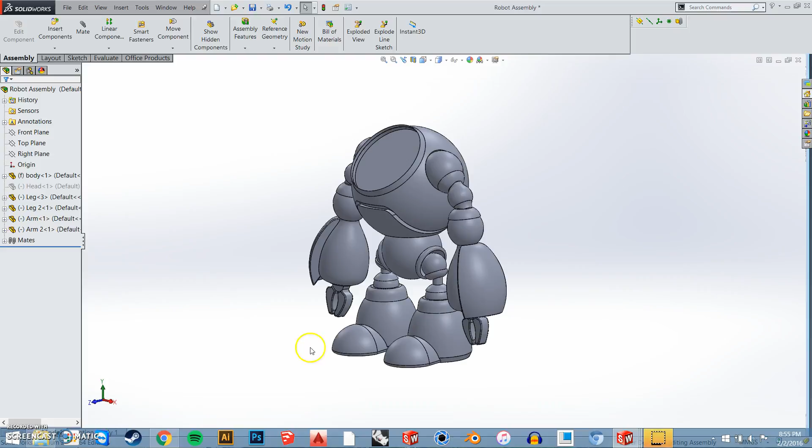Probably one of the first things is that when you're building your parts, you're going to have a left and a right leg, or right and left. But the thing is, you only need to actually build one, and then you create the mirror of the other. So I'm going to first show you how to create that mirror part.

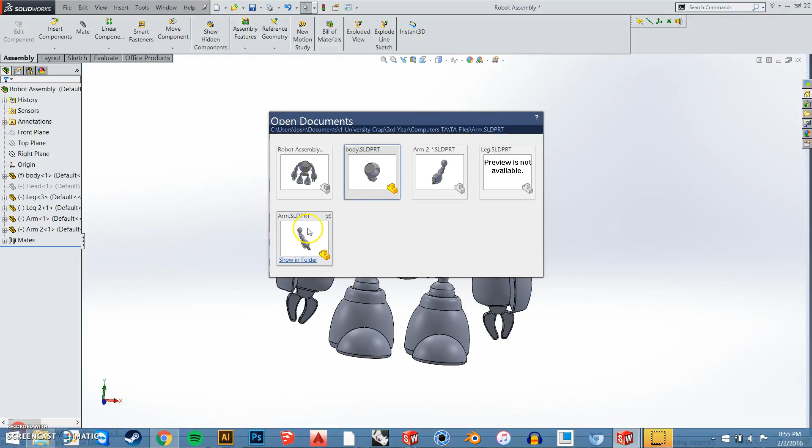What you want to do is open up your part. I already have it open here, and I'm going to use the leg as an example. Actually I'll show you the arm first, because the way Evan did it is another way you can do it. But I'll show you the other way first.

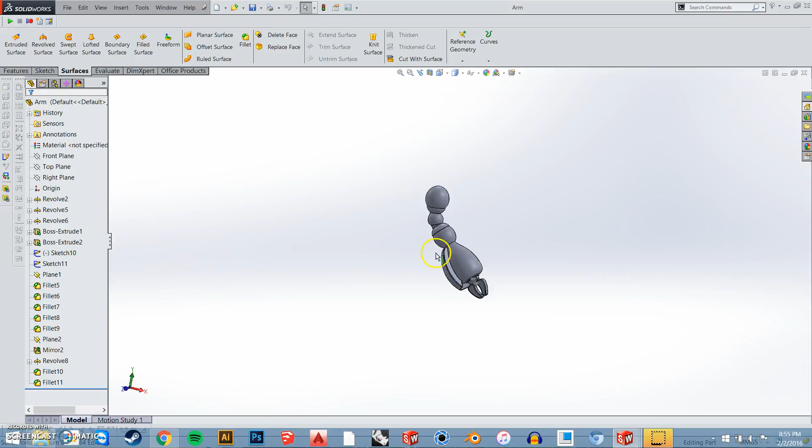So basically what he has done is... this is the wrong one. This is the main part. When you finish your one part, you go and save it as another copy, save it as a different name, and then it'll come up as a different name. So it'll look like this.

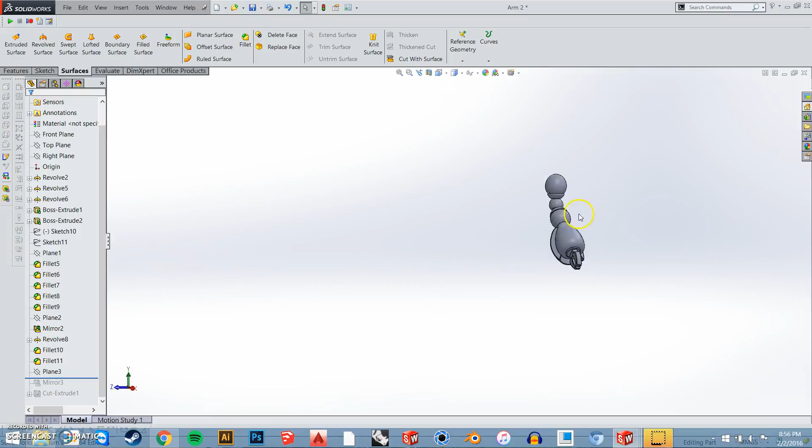It's exact, let me just roll back here. So it's the same part, exact same part as the other one, except it's named arm 2 instead of just arm. So you can name it left arm, right arm, however you want.

But basically what he's done is at this point, he's put a plane. Actually, that's not the right one. Well, basically what you do is a mirror feature right here, and they mirror all the parts. So I'll go back and edit this to show you what it looks like.

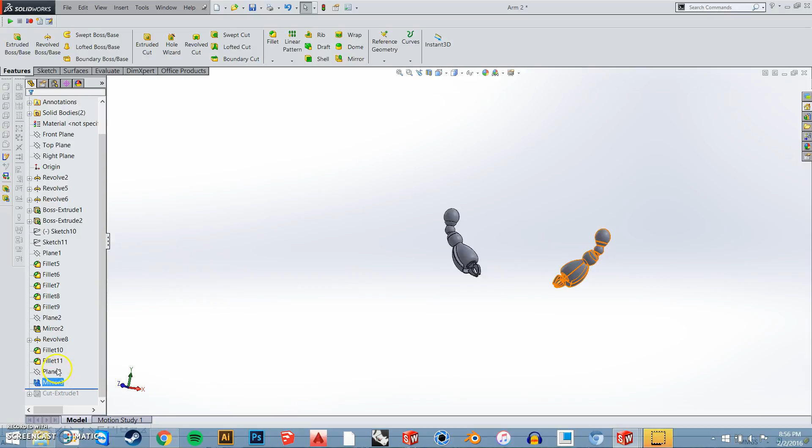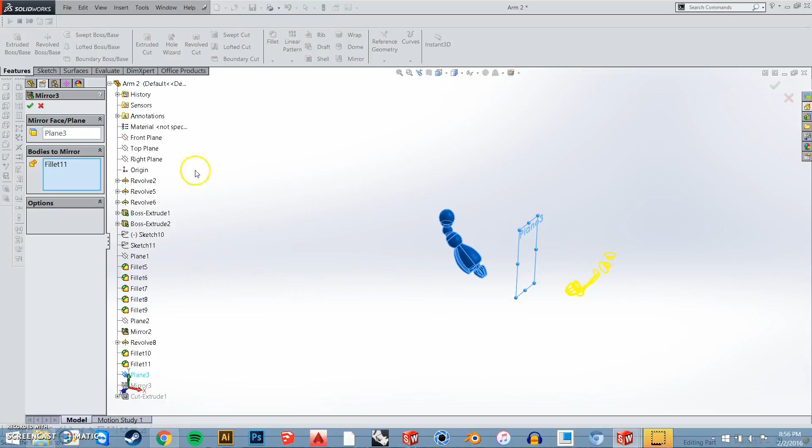Basically, you select... where's the body? Okay, well, this is the body. You just pick highlight and you can cover the whole thing, just like that. And then it'll make a mirror on the other side like this. So you can do it over any plane, it doesn't matter as long as it's not interfering with the original part.

So there, it's mirrored. And so now at this point, he drew a really big square on that one plane that he just mirrored.

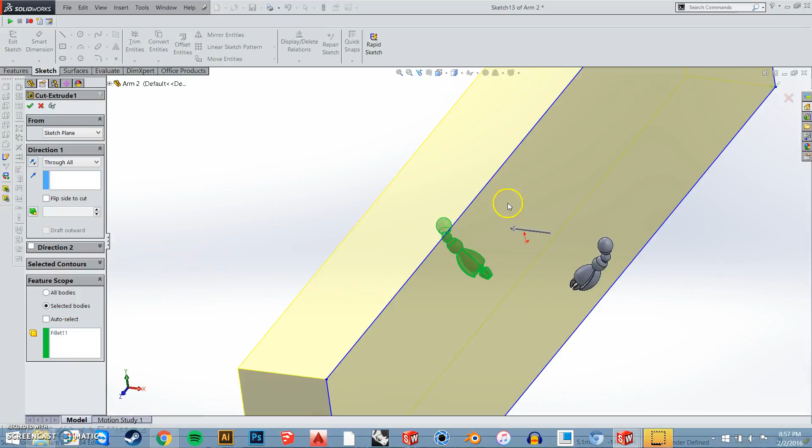And did a cut extrude through just the one body. If you go down to your feature scope, you can select that specific body, and what it does is it completely gets rid of it, so you're left with just the one part.

So what this does is it gives you a mirrored part, but it has all of the features in which you've created it up on the tree here. And that could be good if you actually want to go back and edit individual pieces.

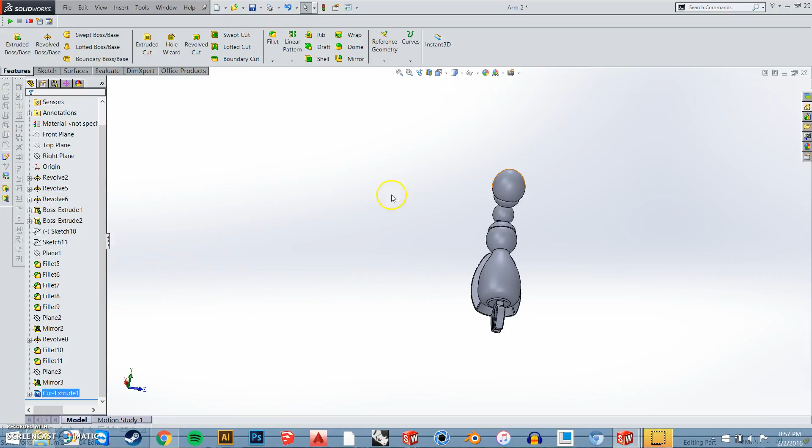But the thing is, once you edit this, it's not mirrored on the other part. So I'm going to show you how to do that properly so that whatever you do to one part will mirror on the other part. It's pretty easy to do.

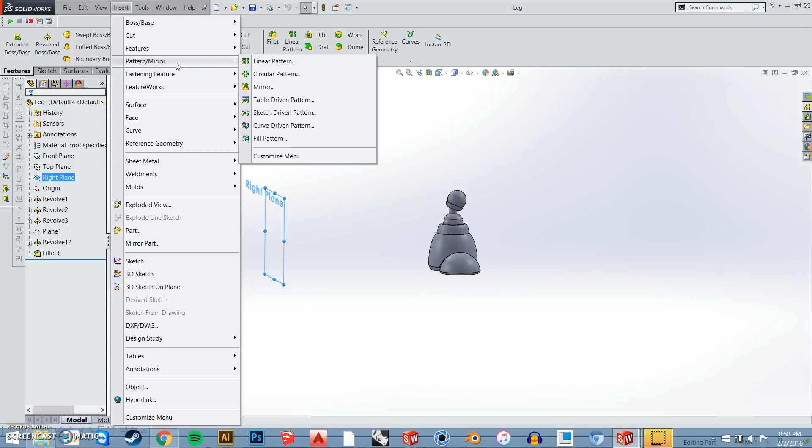All you do is you come into your part, select a plane. Let's go with the right plane for this instance because it's not interfering at all. And if you go to Insert and Mirror Part right here.

Click that. It may give you an error, that's fine. It's just asking what template you want to use. Just make sure you do solid bodies, that's the main thing because we're using solid features. Don't worry about surfaces and stuff, but usually these are selected by default.

It's just saying that any part you work on is good to be like this, and now you have part 1, a new part. So do save as, called it left leg, and hit save.

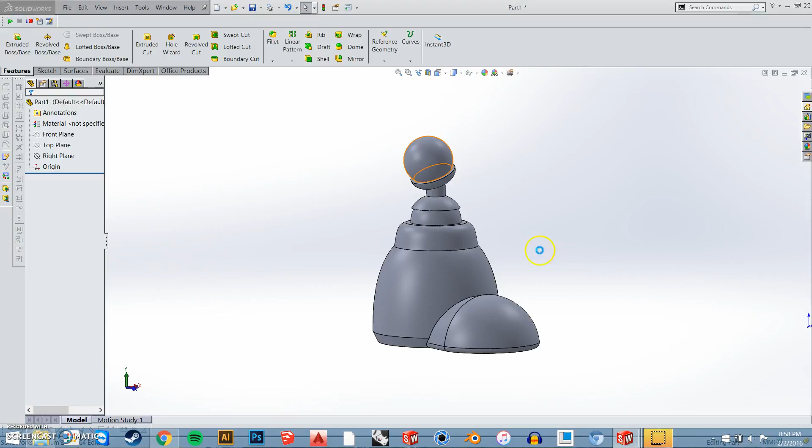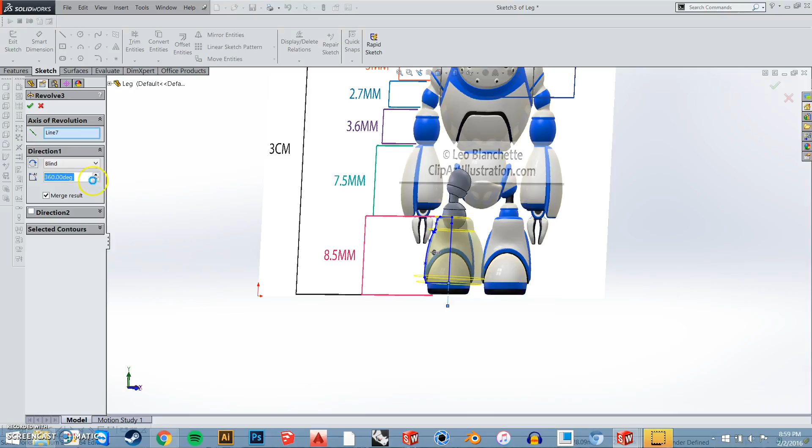And there you go. There's no features in the tree over here, but it's absolutely linked to the other one. So if I were to go into the other leg and edit this, I'm just going to make it look all... let's go 180. I'm probably getting an error here, let's see what happens. Okay, so I've just done that to it. I'll save.

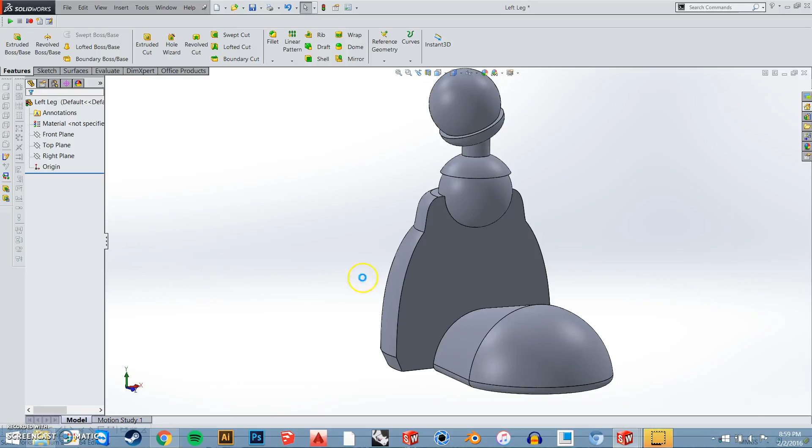Open up my part that I just mirrored, and see how it mirrors it exactly. So if you're doing any sort of editing and stuff like that, it makes it very easy to do. But if you did that where you just made the mirrored part as a feature instead of a part, it won't actually do this where you have to individually do it on both parts. So this is just a quick way and easy way to do that.

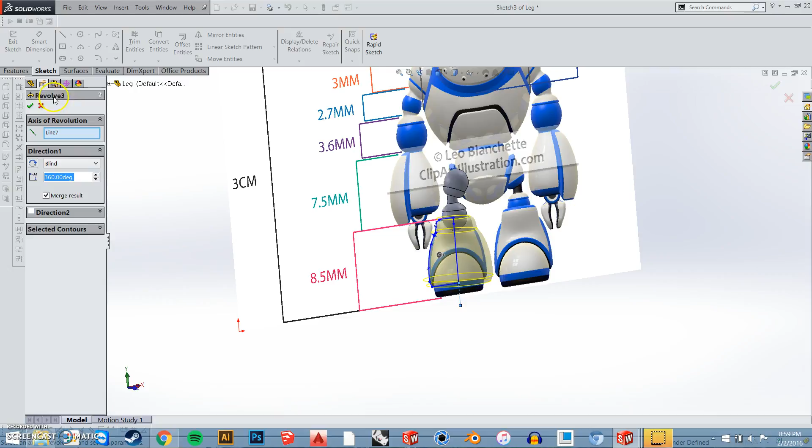So I don't want this to do that, so what I'll do is edit that again. So that's basically just how you set up your parts as a mirror. Let's save that. And you see, it's mirrored exactly as it looked like. So that's the best way that you can create a mirrored part in SOLIDWORKS, and it's also super easy, super fast.

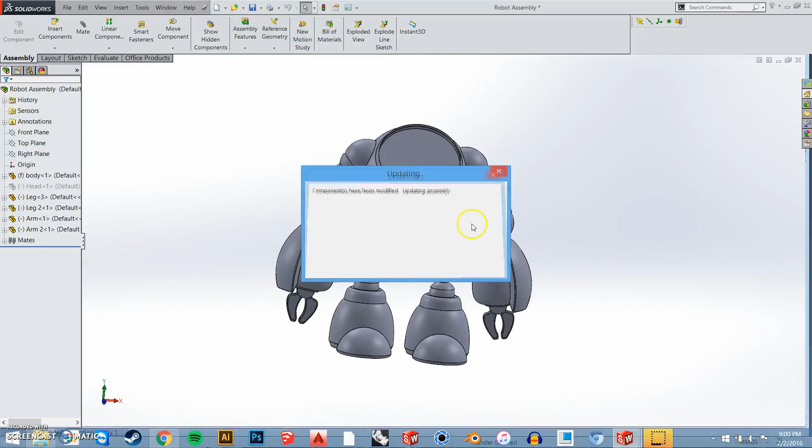So what we can do now is go and start to make this assembly. Basically what I want to do is I'll close this and make a new one. So what I'll do is open up the body just to start from there.

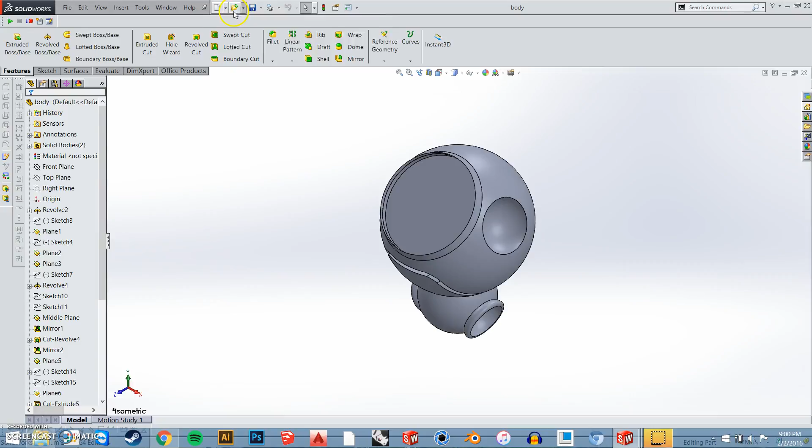You can go up to this new tab up here and go New, Make Assembly From Part. I find the easiest way too is because it default selects the body, or you can—I'm going to select the body for this.

If you go up into View and go to Origins right here, you'll see a little blue origin shows up, and if you click on that, it will snap right to it, and it'll be a fixed part. Just like Jerry was saying before, any part that you insert first will be fixed. So for this instance, it is helpful for this to be a fixed part, so I'm just going to leave it. To import more parts, what we can do is go Insert Component.

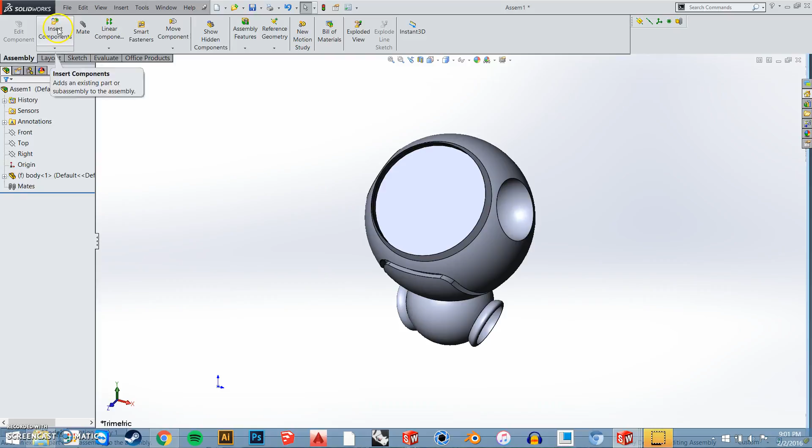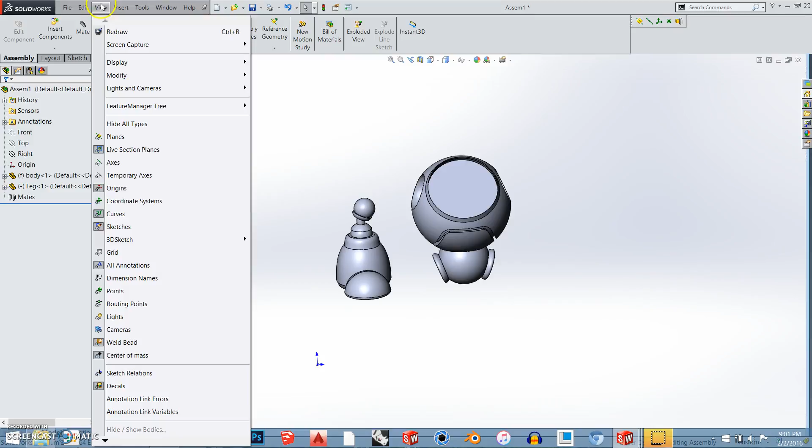I'm going to insert the first leg for now. You can click anywhere in space for now—if you click on that point, it's going to lock it in place, and that's not necessarily what you want, so put it in space for now. These origins might come in handy sometimes, but they're also kind of annoying sometimes, so just to turn them off, you go into View, Origins.

It's pretty simple. So to mate this part to here, I can tell that there's a concentric relation between the two of them. So if I hit the surface, hold Control or Shift, and hit this surface—oh, it gives me this. And it works, yeah, okay, it works.

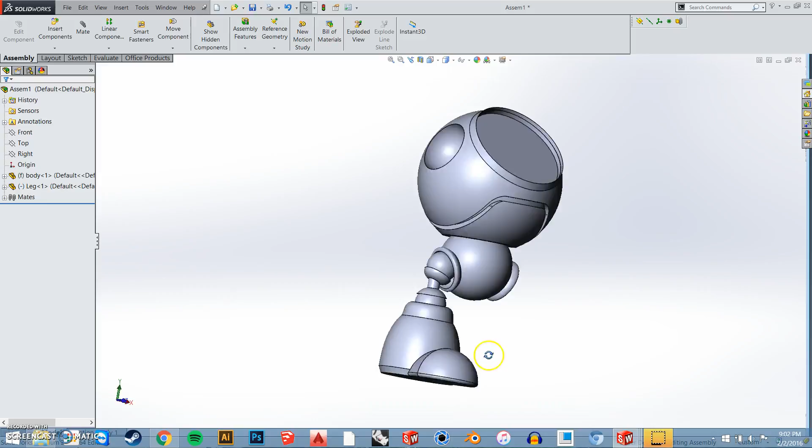And if I were to grab this and start moving it around, you can see how it kind of spins like a little socket joint. That could be helpful if you're making renderings and you want to make it look like it's running or something like that—it's definitely possible, but for this instance I'm going to make it fixed and give it enough relations so that it can't move.

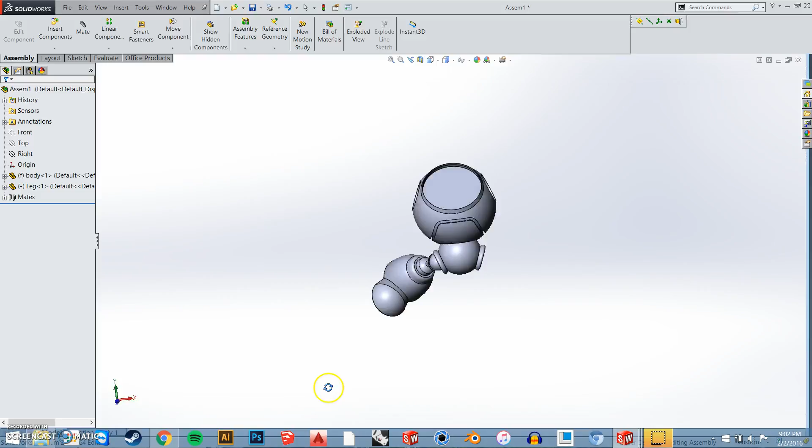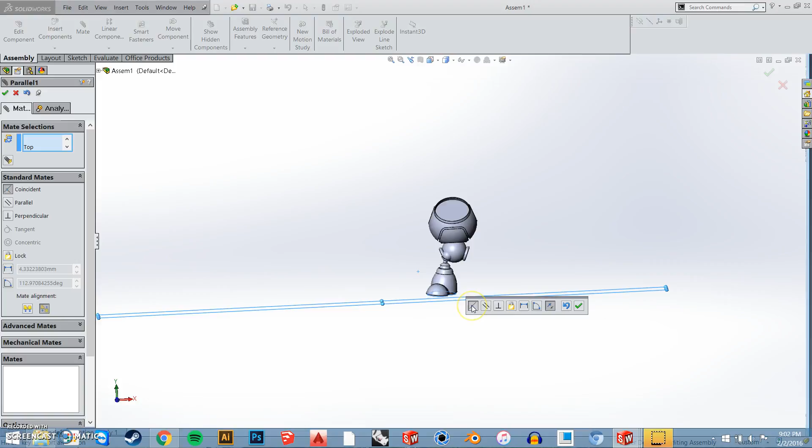So this platform on the bottom I know is flat, and I want to make it parallel to the top plane. So I can hold Control and click whatever I need to and hit Mate up top here. And see, it automatically sets it already because it thinks that I want to put it parallel, and that's absolutely true. I want parallel because if I hit coincident, I should get an error—it says it's too far away, there's an angle on it, so that's why it's asking to be parallel, and that's absolutely fair.

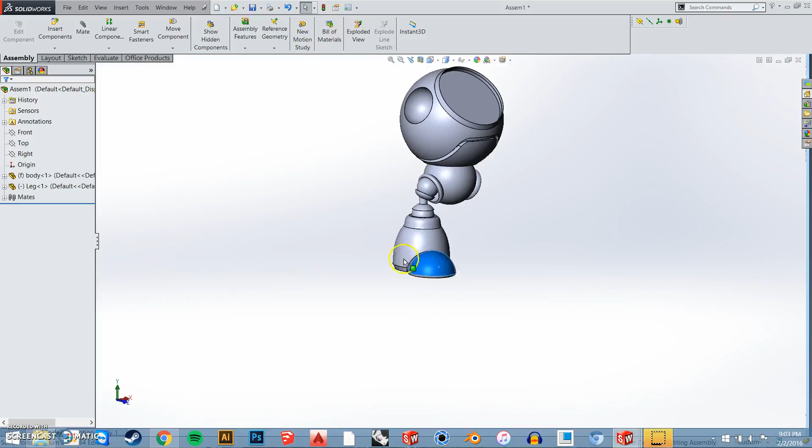So check. And to test and see—because you can see over here there's a little minus sign next to the part, and that means that it's not fully defined yet. It's kind of like a blue sketch, so you can still move it around, and I should be able to see how it spins. That's not what I want.

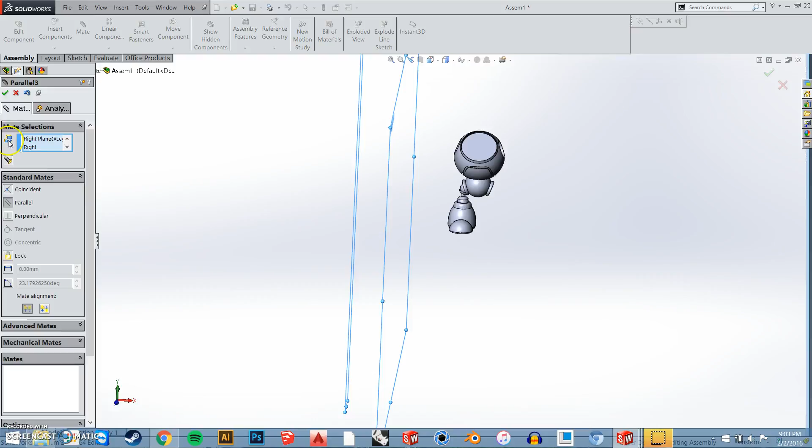So what I'll do is see if I can define another plane within it. So that looks—that right plane may allow me to... I should be able to make those two work. These are things as well, you don't actually need to make surfaces to surfaces or parts to parts—you can actually do reference things within the parts, like the two planes. So I hit Control on both those planes, hit Mate, and made them parallel. Check, and it's still not defined.

I think it's just because it's a pretty loose socket, but I'll leave it there for now. But if you can't actually define it and you want to make it stay in place, you can always right-click on it and hit Fix, and it won't move at all.

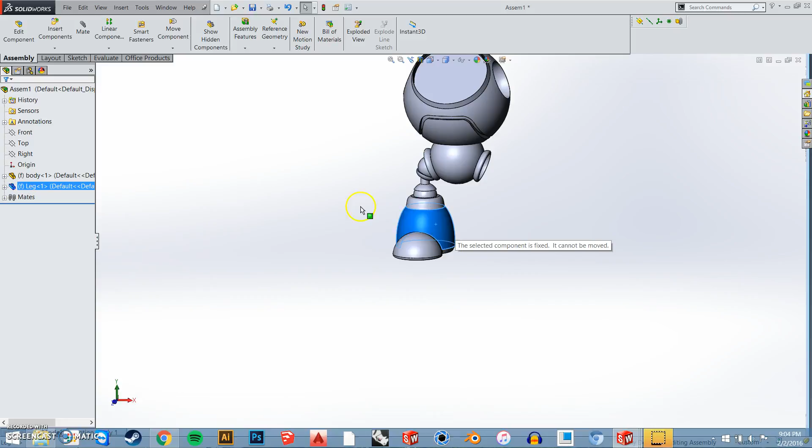I'm just going to leave it for now because it's not going to be that big a video. So that's basically how you insert a part pretty easily. Now I'll insert another leg, the left leg.

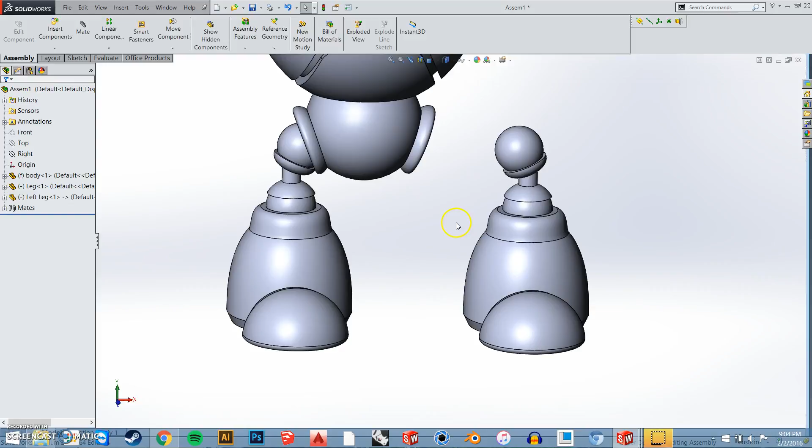If you've watched one of the tutorials I was doing before, I mentioned how using these ball and socket joints is the easiest way to make mates, and it absolutely is. It's very simple to do. You can make some bigger than they need to be, and they'll still stay in place. That's definitely easy, and it'll make things a lot easier if you've done that.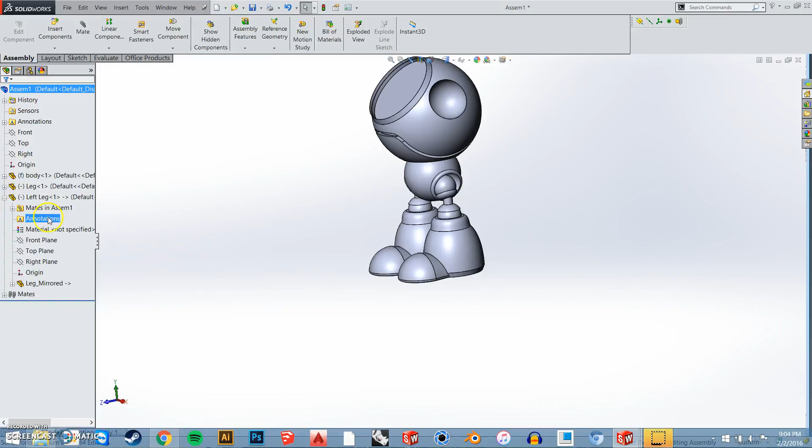Again, let me just do the top plane to the top plane. Actually, in that instance I was able to do parallel, or sorry, coincident. So now that I've seen that actually works, I'm going to go back and edit this mate.

What you can do is click here and then go click on mates in Assembly 1, and it tells you individually the mates related to this. Because sometimes if you go down to the very bottom, especially when working with big assemblies, you'll have a massive list of mates and it's very difficult to find them. But whenever you hover over them, they'll tell you.

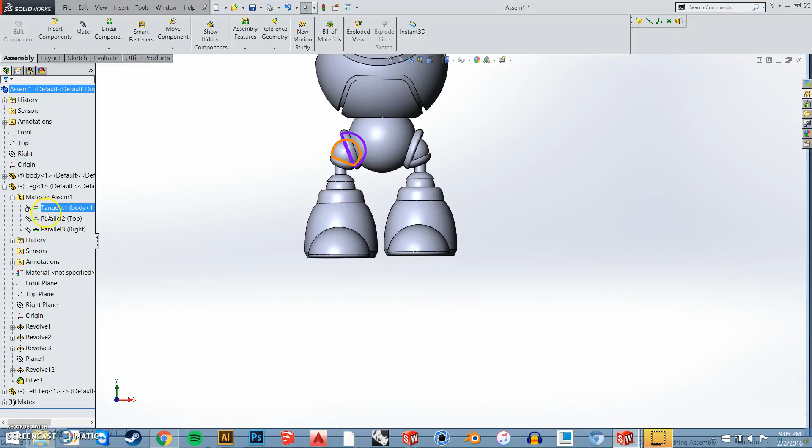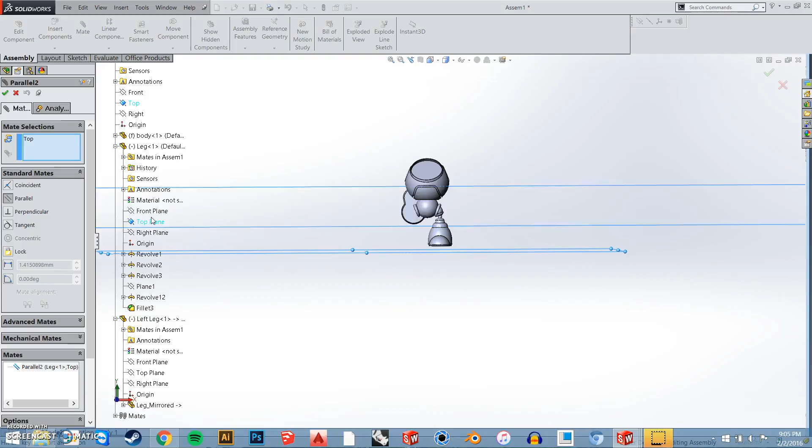So what I'll do is go back into this part and edit this feature, and get rid of that face. You can always open up your tree by clicking the little plus, and I'll go into the top plane of the part. That's not what I want.

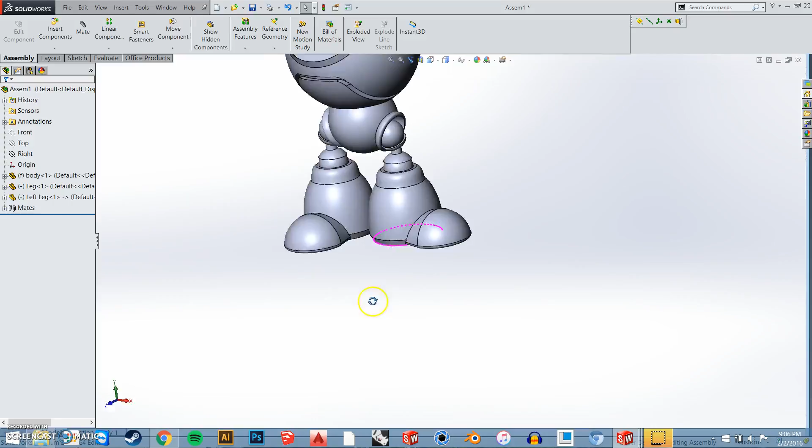Okay, so that worked. This one still spins, so I'll just leave it like that for now, just to get rid of it, because I'm going to go back and suppress a couple mates and show you how you can move stuff around and things like that.

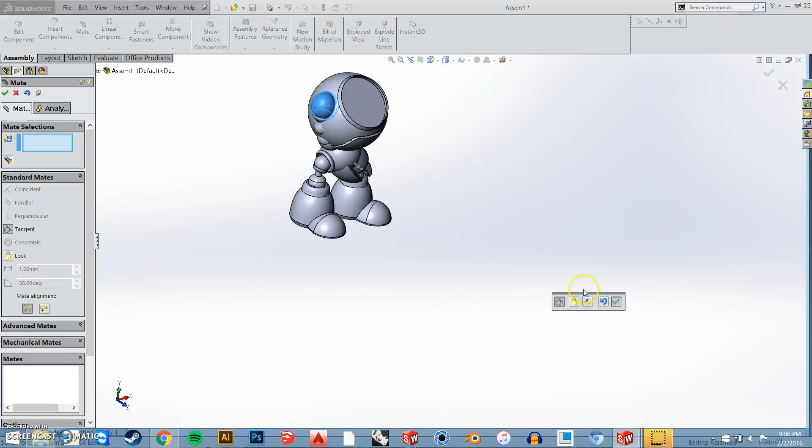So I'm just going to quickly insert the two arms. I have no idea if that's the left or right, but just go with it. It seems to be okay, and you can always shift the part around too if it doesn't seem to be in the right place.

If your parts are exactly the same, like if they don't have any sort of bend in them, you can also copy the part and duplicate the mates. So if you right click on a part, go to copy with mates. There it is right here.

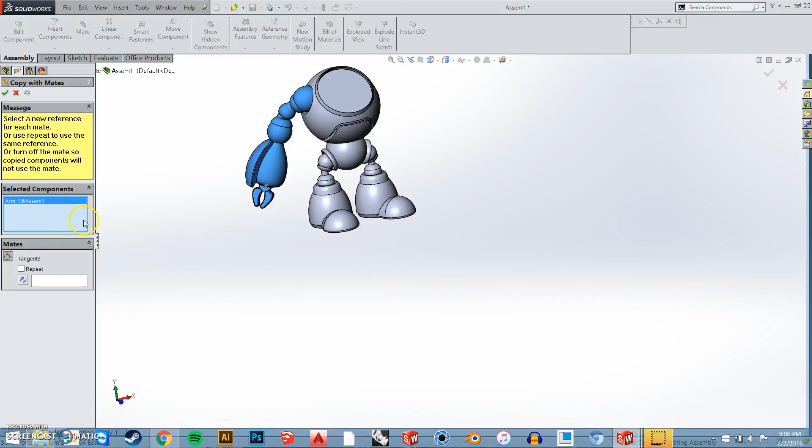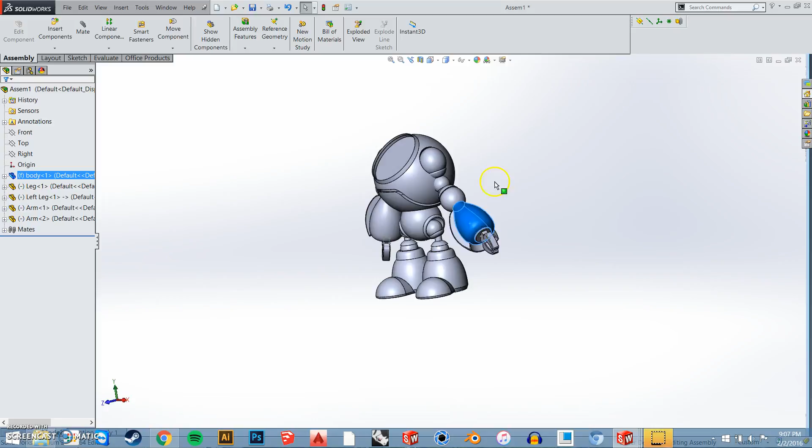It's asking if you want to duplicate this, and I can select this area right here and click on this other socket, and it'll automatically select that, and I just hit check. Now just check again, and you can grab that arm. That's kind of where it should be. There we go, close enough.

So that's basically how you make the assembly. It's pretty simple. Again, if you want to go back into your mates, you can always go and adjust them like this. I have a few more minutes here.

What I can do is show you guys how to do an exploded view with this one. You should have done it in the recent lab we just had, but I'll just go over it again. It's very simple to do.

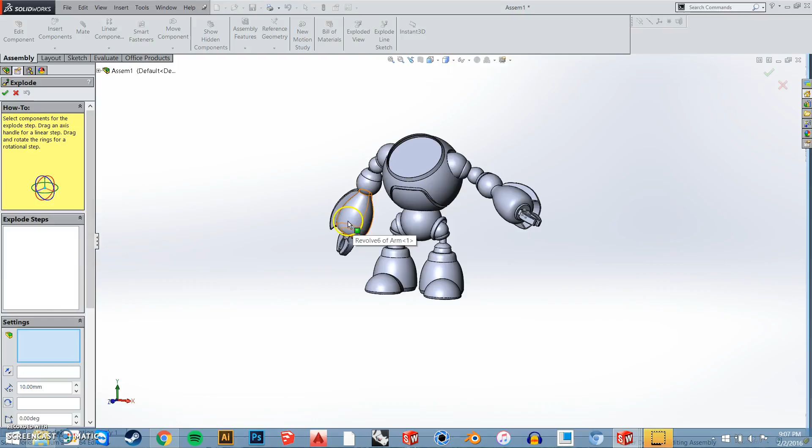All I do is go up to exploded view and pick the parts that you want to explode. I'm going to explode them outward like this, sideways. So I click those two parts, and I come down and do auto spacing, auto space components after drag.

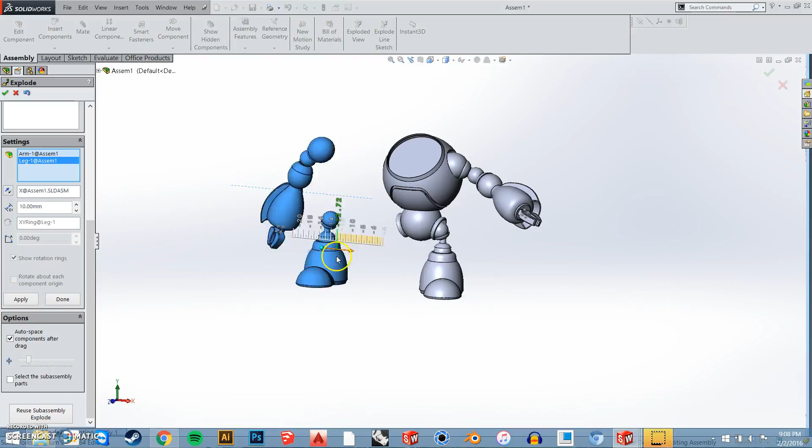So if I drag this out, you see how it snaps away, and if I increase or decrease it, it sets a distance in which to move them at. I kind of messed it up, but...

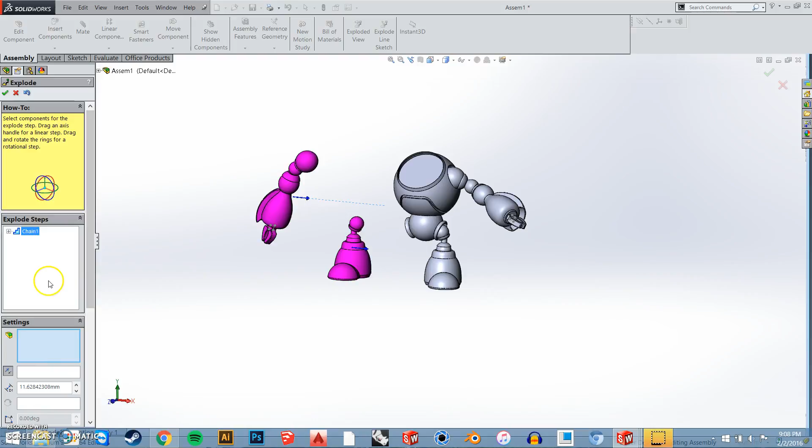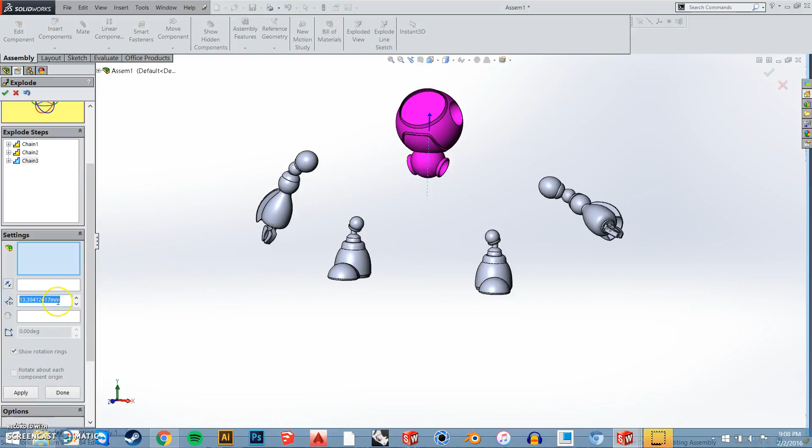You can always do another chain after too, by clicking new parts. This is a bit dramatic for an exploded view—you usually shouldn't do it this big—but that's basically just how you do it. You just move the parts around like that. You can also define them by putting the actual specific measurement in the side here if you need to, and just applying the size after.

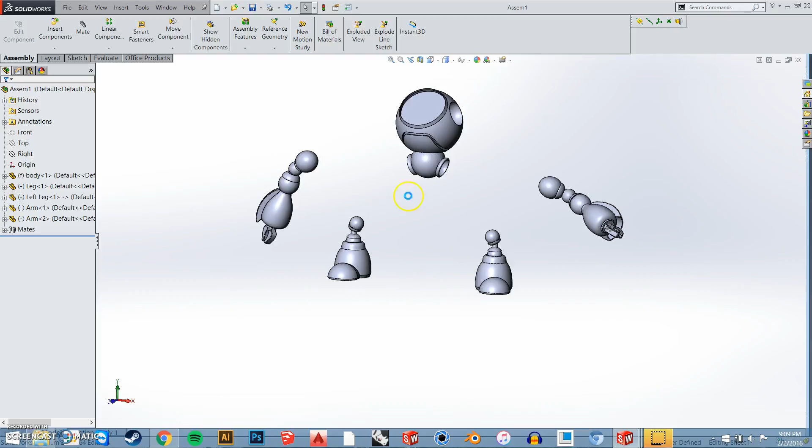And that's basically it, so that when you go and make the drawings of it afterward... just a couple seconds here, hopefully I can do this quickly. Good. About 15 seconds left in this video, so okay, model view, 10 seconds.

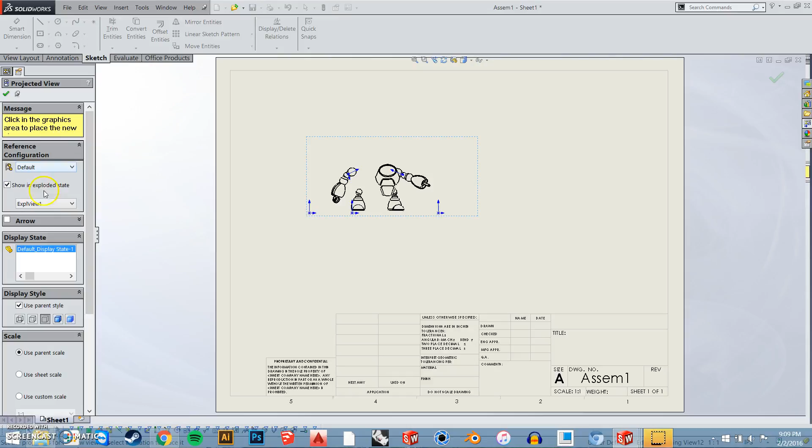If you click on it, you can click the exploded view state right here and you can adjust it too. Okay, thank you.